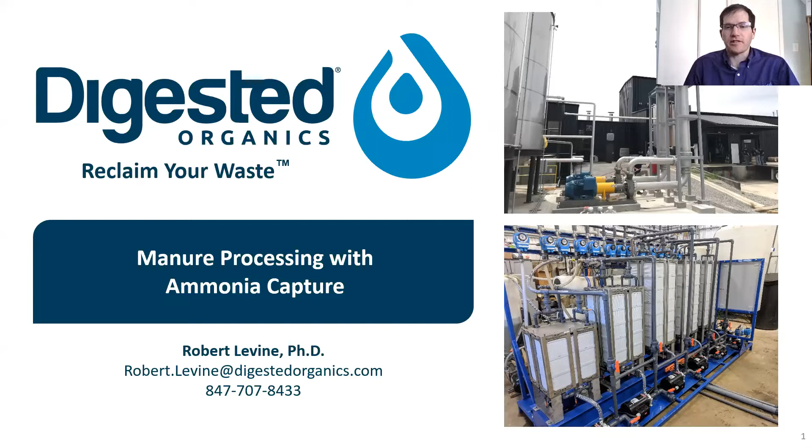A little bit of background about myself. As our moderator just mentioned, my background is in chemical engineering, before that in molecular biology and biochemistry. I studied in Vermont, where I first got introduced to dairy farmers. I worked with digestate from traditional digesters and how we could grow algae to make biodiesel. This was about 15 years ago, during a time when biodiesel and renewable fuels from algae were really becoming more popular. I ended up then working for many years, founded a company that did animal feed ingredients with algae, and now I'm running Digested Organics. We started the company in 2013.

I'll just mention Don Heilman. He's probably in the session here today as well, but he is out of Middleton, Wisconsin. He does a lot of work with farmers throughout the Midwest, and is a really good resource if you're interested in learning more. He's also worked probably 20-plus years with a lot of these farmer-led watershed action groups, so he's very knowledgeable about the space in Wisconsin in particular.

So I want to frame my discussion before launching into the technology and some of the numbers around manure and ammonia levels and processing, just to frame it in what we see happening today. In very broad, simplistic terms, manure management has been done in a very similar way for a very long time, and that is depicted here.

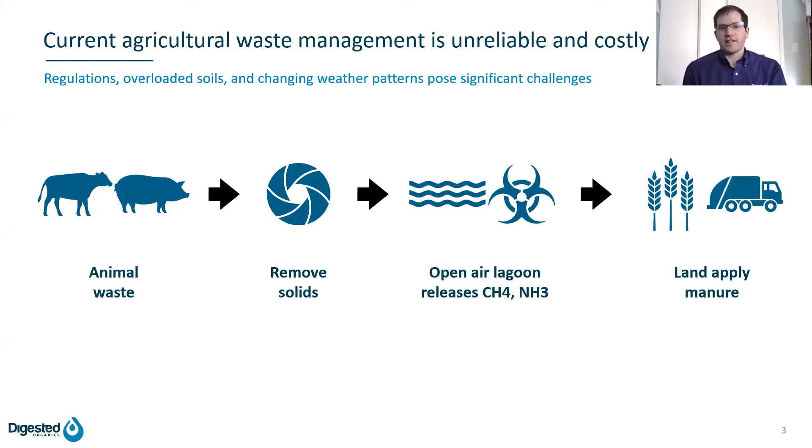So what we've tried to develop is a closed loop platform where we can take this high strength wastewater, in this case manure, and put it through a filtration system to separate the water and make value-added fertilizer products. In most cases, that water can go back to the animal for the animal to drink. Cows in particular drink a lot of water to produce a liquid product as milk. Then we can grow crops to feed those animals, or to feed humans or other animals. So sometimes that loop is truly a circle in a very tight way around a specific farm.

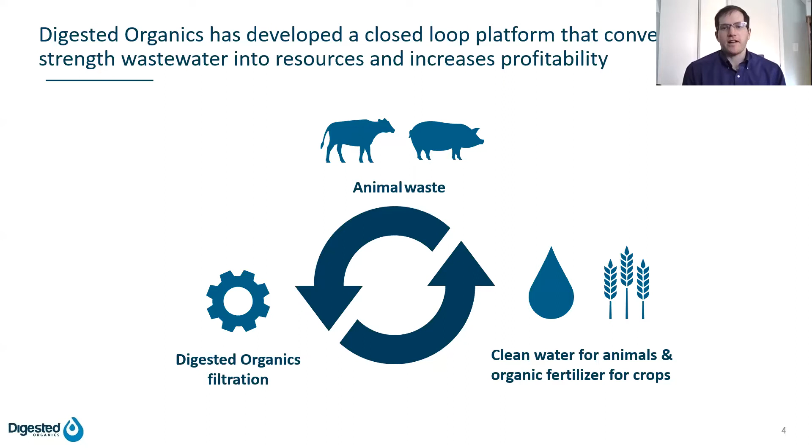But in other cases, we're spinning off the fertilizer component out of that loop to a nearby regional watershed or areas that can use those nutrients. By doing this, we're hoping to derive significant value for the waste generator, in this case the farmer or project developer running a digester project, and improve the environmental performance of these facilities, as well as create circular economies.

So a little bit about how we do that. We have 4 core technologies. Today I'm really going to be talking about 2 of them and showing you some examples of how this plays out on a typical large Wisconsin dairy farm.

The 4 technologies we have to capture nutrients and reclaim water are: a spiral brush filter, which is a self-cleaning screen; a stainless steel ultrafilter, which is a tubular membrane filtration system; a process we call 2-step reverse osmosis, which removes the water from the wastewater; and membrane bioreactors, which are essentially high-rate digesters that use ultrafiltration.

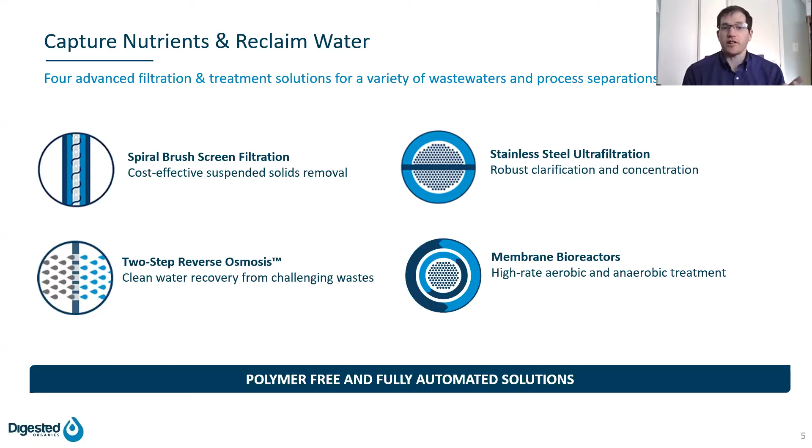All of our processes are polymer-free and don't use any chemical additives, which means all the products we generate are organic certified.

So just briefly, this is the spiral brush filter. It's ideal when we're talking about manure for things like dairy flush water or lagoon effluent, before you're trying to irrigate, to reduce solids loading to your lagoon or clogging nozzles in your irrigator. This can sometimes be used as a pre-treatment to some of the ammonia capture technology I'll tell you about momentarily.

Essentially it is a wedge wire screen, not that different from what a screw press screen looks like, but it has a self-cleaning brush instead of an auger. That brush spins at a decent RPM to create a cleaning effect and pull the solids down to the bottom. Manure comes into the top flange, goes through the inside of the screen and out the bottom as a filtrate, a cleaned product. The solids accumulate inside and get purged out the bottom automatically. It doesn't have to shut down to backflush the way a filter press or sand filter would; it continuously processes material and purges at the bottom when needed.

So this is a relatively low-cost platform. It can handle high volumes. Especially if farmers are looking to clean up flush water or keep solids out of their lagoons, this is an ideal tool. Sometimes that pre-treatment gets us to the next step where we do the ammonia processing.

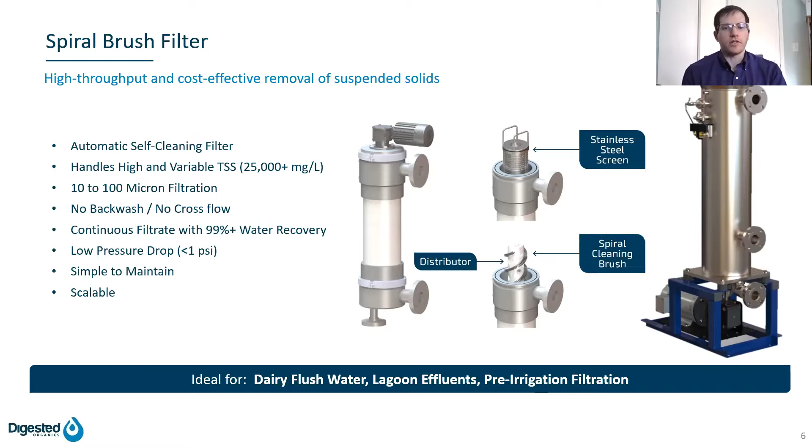That membrane is very robust and has very small pores -- the average pore size is 0.02 microns, about 10 times smaller than a typical bacteria. So it produces a very clean filtrate with no bacteria, very little phosphorus, and very little organic nitrogen, all within this stainless steel system. It's very abrasion resistant, and there are actually no moving parts inside the filter unit -- just a centrifugal pump that circulates the material through it.

So it's designed to be robust enough for manure. And that traditionally has been why manure has not been filtered using ultrafiltration, let's say, is because it's just a very difficult material to handle. There's fibers in it, there's sand and grit in it, there's minerals from the cows being fed.

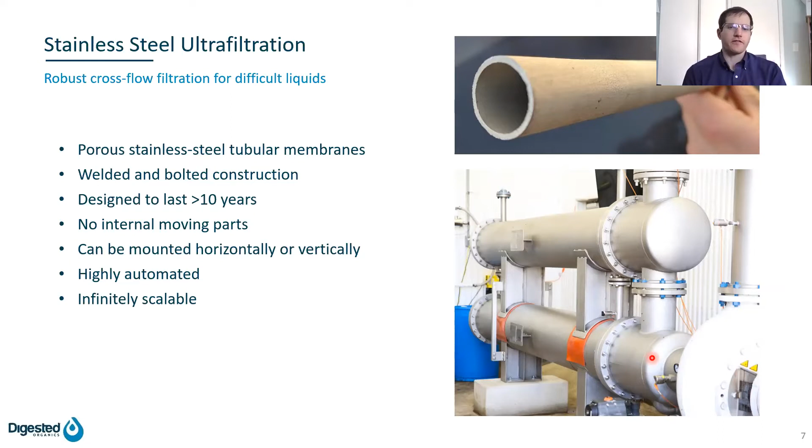Some of the benefits of this platform relative to other nutrient separation technologies are that we're not using any polymers, so we don't have the cost for that, and we don't have to handle those chemicals. And again, our fertilizer products can be organic certified.

We have a very high reliability. These stainless steel tubes are welded in place and essentially will produce the same quality filtrate day in and day out with really very little that can upset that. It's not like you can have a bad day and let more dirt through the tubes, or be like a biological system where sometimes the bacteria in the digester are doing really well, and sometimes they get out of whack because maybe it becomes too acidic or too basic.

So it's a mechanical filter process that's very robust. The next point is it's a very clean process because it's all in pipe - there's no open vat of manure, we're not bubbling air through the manure like a DAF, we're doing nothing to create odors. It's all in pipe, and that also helps reduce the amount of ammonia that would otherwise be lost, which, as we'll also talk about, is a product that we want to make.

Again, it creates a valuable separation. We believe in most cases that the parts of something are more valuable when they are apart than when they are together. So in this case, when I can turn manure into water and organic fertilizer, that's obviously much more valuable as those two pieces than it was together when it was just manure. And this accomplishes that for us.

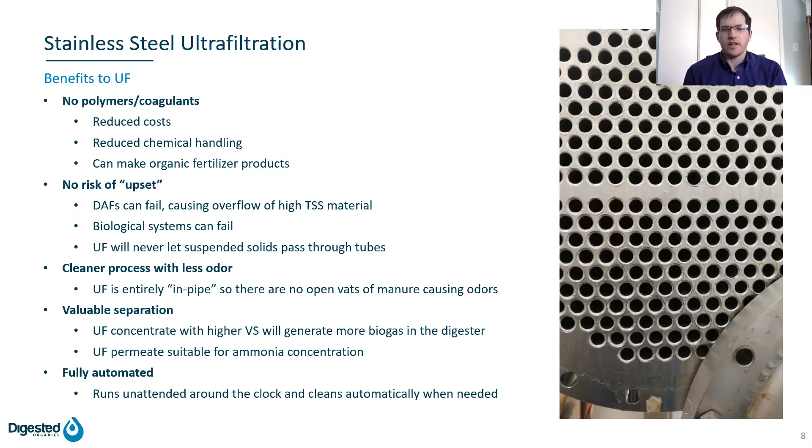So this material that some people call tea water is very, very low in phosphorus and organic nitrogen. It essentially has no pathogens or suspended solids - again, we've removed all the bacteria. And it is also very, very low in volatile solids.

Volatile solids, for those that might not be familiar, are the solids and organic matter that gets converted into biogas in a digester. So you want to put as much volatile solids in your digester as you can to make as much gas as you can. If you digest manure and the volatile solids that didn't get digested come out the back end and go into your lagoon, those can continue to degrade anaerobically, release their methane to the environment, and you didn't capture the gas value that you could have.

Plus, there's the environmental degradation from that release. So another benefit beyond fertilizer production here is that if we ultrafilter manure, we can actually capture those undigested volatile solids and do a few things with them.

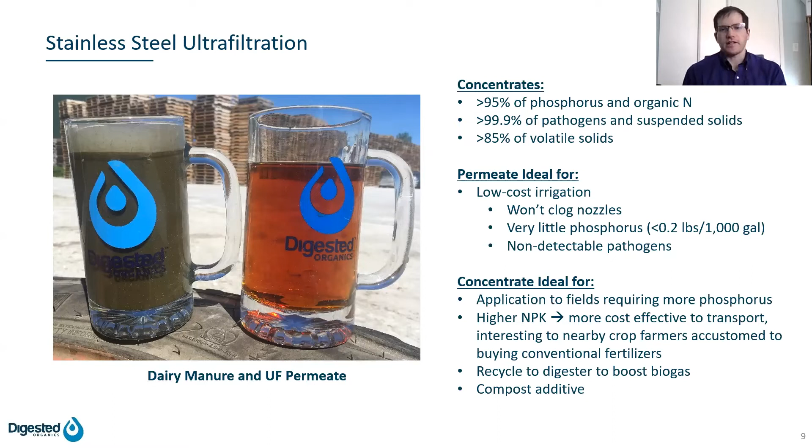And then we can stabilize that further by doing something like composting, for example. So here we worked with a very large composter in the state of Vermont, outside of Middlebury, and we were able to show that we could create a recipe where we mixed ultrafilter concentrate with dairy fiber from screw presses, along with other normal, dry ingredients that composter was using at the time to make recipes where the compost turned out in certain ways better than a control pile of compost.

So it heated up faster, it reached maturity faster, it had higher levels of nutrients, and going back a little bit to what Dr. Zavala said about the cost per pound of phosphorus control and things like that, this is actually a dramatically lower cost solution than a lot of other solutions that farmers are doing today.

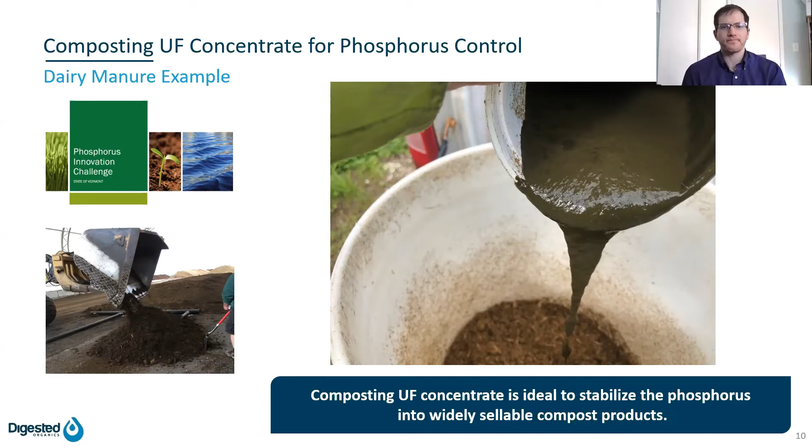Here we want to go one step further and say, now I want true volume reduction, and I want clean water, and I want fertilizer. So this is where our second stage process comes in. We call it two-step reverse osmosis. It is a combination of two filtration technologies.

It's kind of like it's working backwards from reverse osmosis. So we're basically drawing the water out of the wastewater and into salt water. And then we put that salt water into a reverse osmosis system to make clean water and recycle the salt, because we don't want to be purchasing salt all the time, obviously. We sort of charge the system with salt on day one. We're trying to keep that salt in a loop throughout time, and let the forward osmosis system do the work of dewatering the material.

I think it's important to point out that a lot of farmers and project developers we work with have estimates of how much manure they have and how much water they use. Sometimes those estimates are really quite detailed and accurate. Other times they're not, and plus there's variation seasonally and with weather. So I think we strive to give this data to the farmer, to the project developer, so that they can take actionable decisions based on the data.

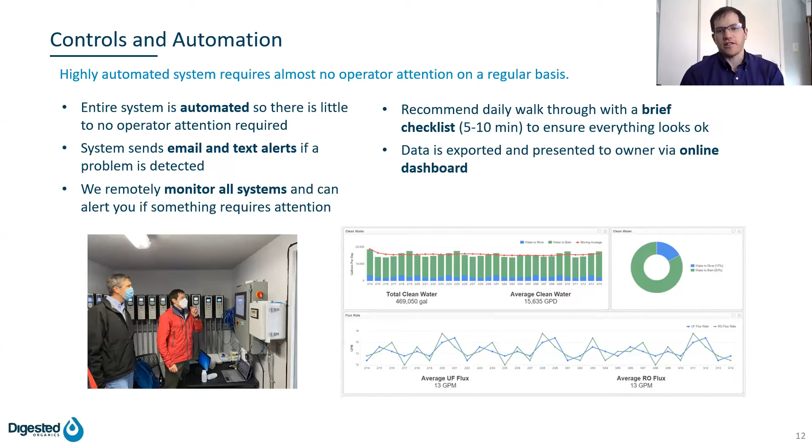By actually knowing what your throughput was every day, and then tying that to a nutrient analysis to understand where your pounds of NPK are going on a very detailed basis, I think can bring a lot of value. So that's something we talk a lot about: through the automation that our system needs just to operate well, which includes flow meters, pressure sensors, and temperature sensors, how do we then package that data for our customers and the farmers to make the most use of it?

The next step is ultrafiltration, like we talked about. Here we're removing the suspended solids, the pathogens, and the phosphorus. We're creating a fertilizer product called UF concentrate, which I think ties into what we heard earlier about phosphorus management and how there's sort of imbalances.

We've talked to a lot of dairy farmers who have manure, who have land right next to crop farmers who don't want to touch manure because they think it's too dilute and it's not worth their time to haul. And the dairy guys are desperately trying to get rid of the manure because they need help spreading these nutrients out. And their neighbors say, we don't want to help you, that's not worth our time. But when you show them an analysis of what UF concentrate has in it, which is essentially 3 or 4 times the amount of nitrogen and phosphorus, now I think there's an opportunity to interest other stakeholders in a watershed to say, can you help me move these nutrients? They're now much more cost effective to move.

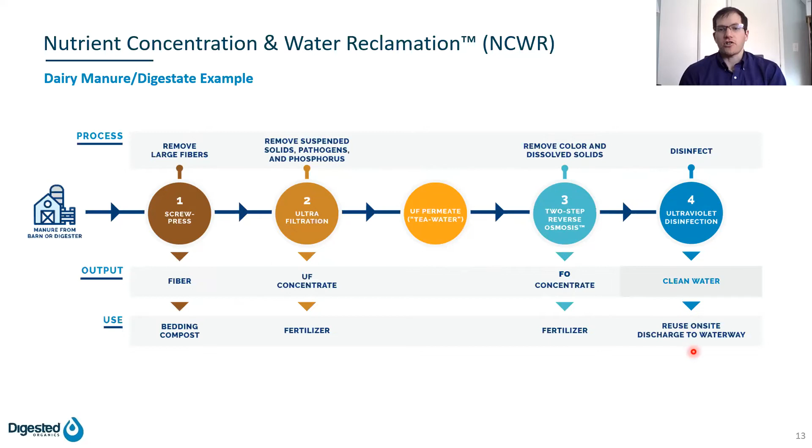So now let's put some numbers to all of this and give you guys a little bit of a case study. The numbers I'm going to show you are a little bit simplified just so I could use round numbers and keep it a little bit tidier.

Essentially, we're going to start with 1,000 gallons of digestate. We're going to screw press it. Usually we lose about 10% by volume in a fiber pile, leaving us with 900 gallons going to the ultrafilter. The ultrafilter will do about a 75-25 split, so we'll have 675 gallons of permeate and then 225 of concentrate. That goes to the two-step RO, becomes about 175 gallons of FO concentrate, which is that fertilizer product, and about 500 gallons of water. So this is about a 50% water recovery on a whole digestate basis, or about 55% on a liquid basis if you start with the 900 gallons out of the screw press.

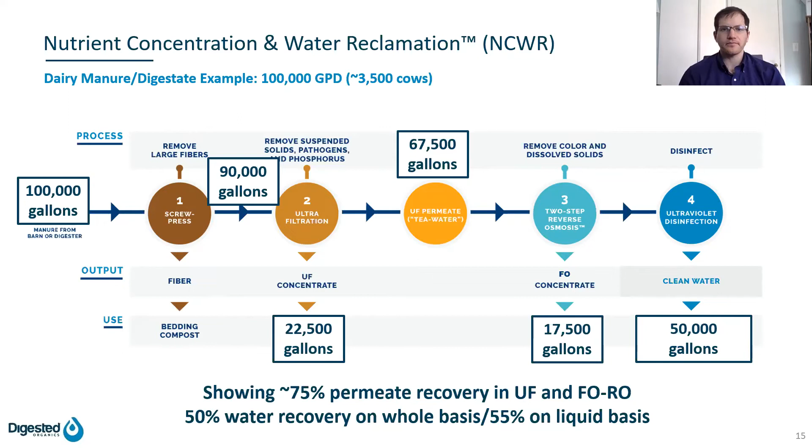Now I'm just going to multiply all of those and say, let's assume we have 100,000 gallons per day of material coming in, which is about a 3,000 to 3,500 cow dairy, which we see commonly throughout Wisconsin and in the Midwest. So the numbers are the same, they just got bigger. Now let's look at what's in that material typically.

I'm showing you, we've done both at our commercial site in Wisconsin, as well as dozens of other pilot tests with equipment on site at farms, lots of different dairies. So I pulled a typical Wisconsin dairy that had a digester, which is a DVO style with a screw press, and then also a typical Indiana dairy. So both of these are digestate. You'll see that they're very similar.

So the liquid pressate, we typically go to a farm and we pick up the pressate out of the screw press. The liquid pressate has 3.4% total solids or dry matter, and here at this farm it was 3.8. We ultrafiltered that and created a permeate that was about 1% total solids, or 1.1%. And then the thickened product was between 8 and 9% total solids, and that's just based on how much permeate we removed - in these tests it was a little different.

The ammonia content in milligrams per liter was about 2,030 in the raw material at the Wisconsin dairy, and about 2,400 at the Indiana dairy, so pretty similar. The UF permeate, in theory, should have the exact same amount of ammonia as the liquid pressate and the concentrate, because it's a soluble molecule, so there's no reason for it to stay inside our tube or go outside the tube. It's going to be distributed evenly everywhere.

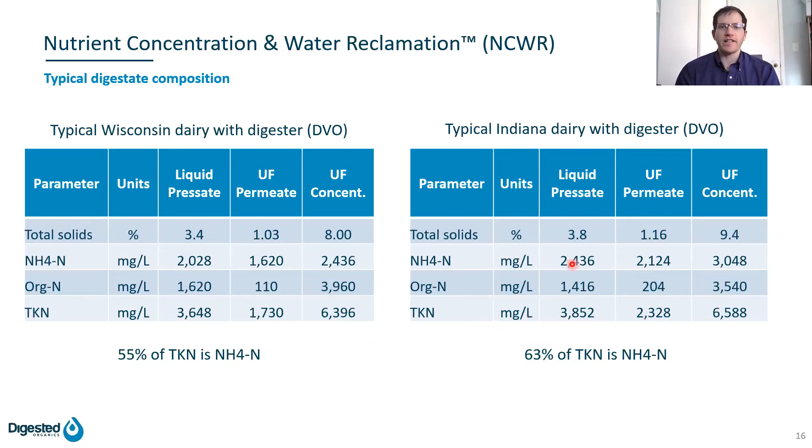So what I did is I took these numbers and I created a mock mass balance for the same flow rates, with numbers that I basically just rounded. So I assumed that the digestate came out of the digester at 5% solids. I put it through a screw press and made like a 10% volume cut at 20% solids, and the UF feed at 3.3% solids. So this is pretty similar to the data I just showed you in terms of the ammonia content, the organic nitrogen content.

Essentially, I'm just modeling this for the UF feed, the UF permeate, UF concentrate, and then FO concentrate. So this is the concentrated UF permeate. Basically the 2,000, let's say 2,100 milligrams per liter of total nitrogen in the UF permeate becomes 8,200 ppm in the FO concentrate. So that's what happened when we removed all of that water.

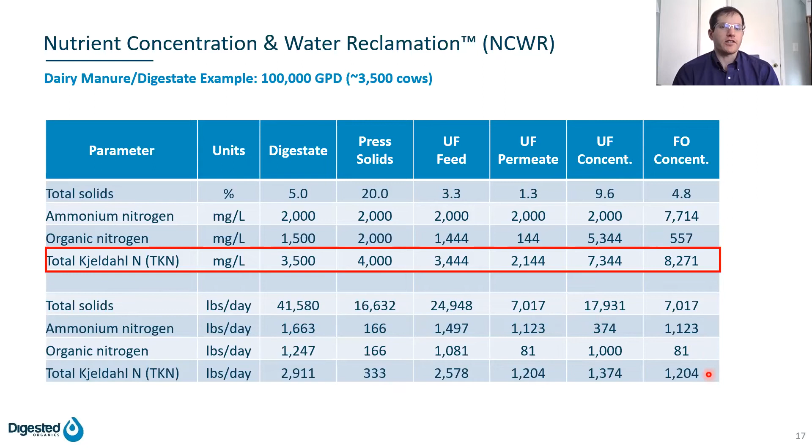Down below, the units are now pounds per day. So you can think in concentration in percent and milligrams per liter, or pounds per day. What you can see here is that in terms of ammonia, we have something like 1,600 pounds per day of ammonia in the starting material, and we're capturing about 1,100 in our FO concentrate. Obviously, we're losing some in the solids out of the screw press and some in the UF concentrate, which doesn't then go into our fertilizer product. But we're capturing a very high proportion of the total ammonia and the total nitrogen in this process.

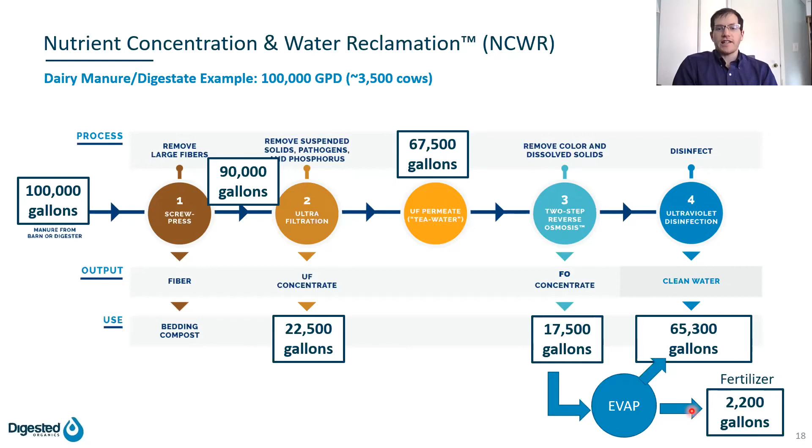So going back to the same flow diagram, I've basically just added on one extra step where I've taken that 17,500 gallons of FO concentrate. I've put it through an evaporator, which removes water. I get to add to my water pile. So instead of making 50,000 gallons of water, I'm now making 65,300 gallons of water. And I've made 2,200 gallons of fertilizer. That fertilizer is a 6-0-5 fertilizer.

So this is that same chart you just saw. Now I've put another column on it for evaporator concentrate, which is our fertilizer product. You'll see here that the total nitrogen is 65,000, which is 6.5%. Obviously, we're calling it a 6% fertilizer. Here I'm showing you that we're making it a little bit richer than that, which is typically what you do to guarantee your fertilizer label.

So this process is capturing most of the nitrogen, and it's making a product that is about 6 to 6.5% nitrogen, and it's a liquid product. So even though the dry matter content is up around 40%, it's still a liquid product. It looks like sort of a thick, dark honey, but it's easily dilutable. It has no large suspended solids that would clog irrigation nozzles. It's essentially a condensed form of manure after ultrafiltration.

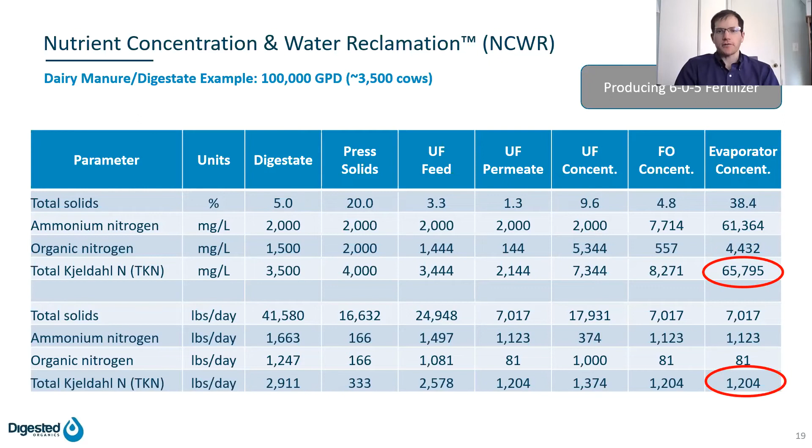So let's summarize what just happened. A farm that has 100,000 gallons per day of digestate and roughly, let's say, 3,500 cows just produced 800,000 gallons per year of liquid 6-0-5 fertilizer. And they've exported 439,000 pounds of nitrogen from their farm. That's nitrogen that used to be heading to their lagoon.

Now, here's the interesting part. Most dairy farmers will tell you, I suppose swine as well, if you have an uncovered lagoon, you probably lose 30 to 50% of your ammonia nitrogen every year to volatilization. That means that the ammonia in that liquid is volatilizing, becoming gaseous, going into the air and leaving your lagoon, and you never see it again.

There's different estimates for this. I pulled up a paper that showed it was about 25 to 50 grams per head per day, which for this example would be between 70 and 150,000 pounds per year of ammonia. So on the one hand, if you're the farmer who needs nitrogen to grow crops, you've just lost a lot of your nitrogen to the atmosphere, and you're not getting it back. That's also bad for the atmosphere. So ammonia is a precursor for particulate air pollution.

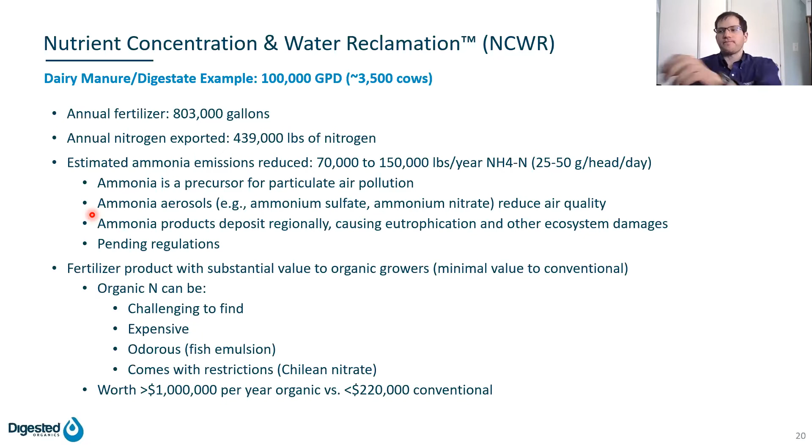I'll summarize and wrap up by thinking about this with two hats on. One is the farmer who owns the animals and is making the manure, and the other is the project developer, because those are the two main stakeholders we tend to work with. The farmer - it's typically their farm, their family's owned that land for generations. They're invested in running a good operation and being responsible stewards of the environment. But they know manure hauling and spreading is probably one of their biggest headaches.

By implementing a manure treatment system that captures ammonia, they can reduce spreading and hauling costs. But really a lot of it is about eliminating the management of their lagoon and the challenges they experience with it. By reducing volume - making water that leaves the system by going back to the cows to drink or into a river - they get significant volume reduction, and that reduces the headache. It essentially takes a lagoon that maybe only provided 200 days of storage and now provides more like 350 to 400 days of storage.

So it can dramatically help improve that side of the operation. When we concentrate nutrients and take that pressure off farmers for managing their lagoon levels, I think we get better nutrient application and therefore less runoff. That can also lead to fewer trucks on the road with lower volumes. But really, when you apply is a major component in the amount of runoff and uptake your crops get. You often apply manure not because it's the right time of year or right for your crops, but because your lagoon is full and you need to do something before it overflows and you have a much bigger problem.